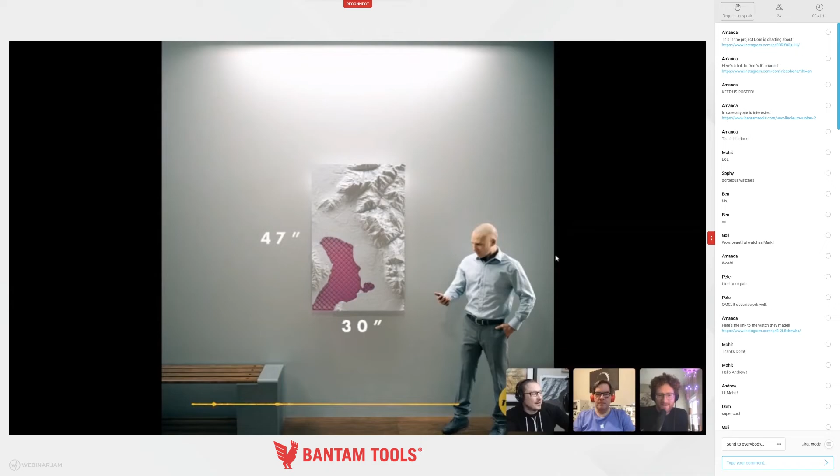Then I had to go over the benefits of using the wood and fitting their cushion in - if we wanted to fit the cushion in, it was going to have to shrink down a little bit. I explained this much better in the actual audio. I'd explain when you use these exotic woods, they tend to oxidize over time and get darker, somewhere between 2 or 10 years depending on how much UV light exposure there is.

But also I was trying to push the high density urethane that I wanted to use, which is kind of funny at the end. So the big challenge was embedding this really flexible rubber inside the piece from the back, without having it fall out, while still allowing visitors to manipulate it.

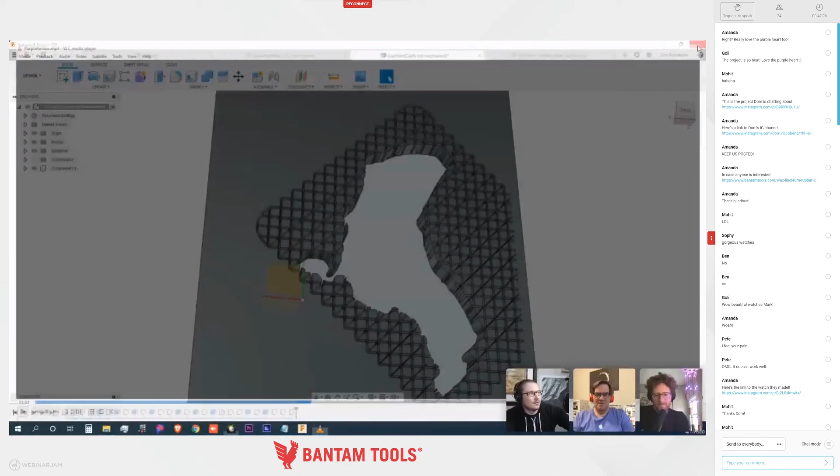The original concept had this corner exposed, and I scrapped that and zoomed out on the terrain more so it was totally surrounded. These cushions are super springy and they twist and go all over the place, so what I had to do was machine the tooling that would have been used to make that into the back of the piece, which was a really difficult operation.

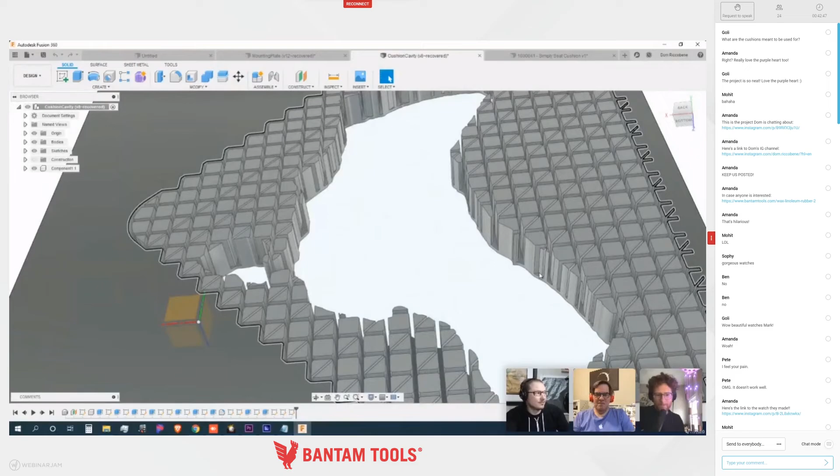Luckily I used really dense material - 100 pounds per cubic foot. I just had to slot out all of these grids, like their injection mold probably looks like. That was really difficult with such hard material, and I had to use an 1/8 inch bit, going little by little. I think I have some footage of that - that's crazy.

Is it silicone or what's the material? It's called MB5000, it's the tooling plank, used for nickel plating mandrels. Oh okay, really hard - it's as hard as a hard hat.

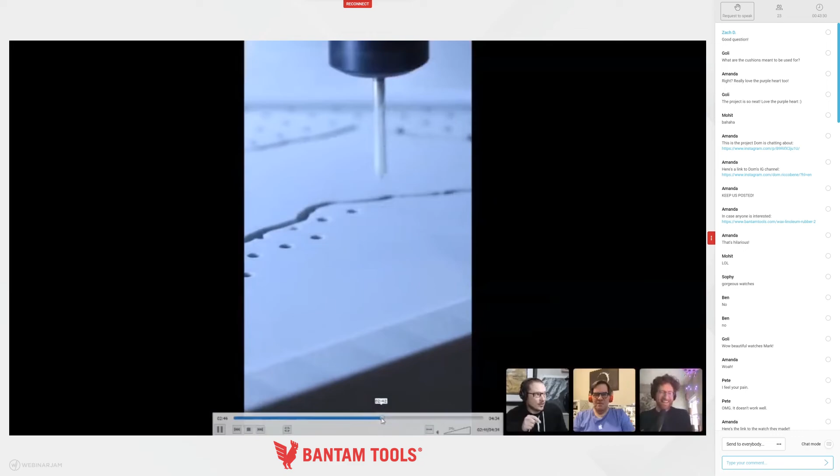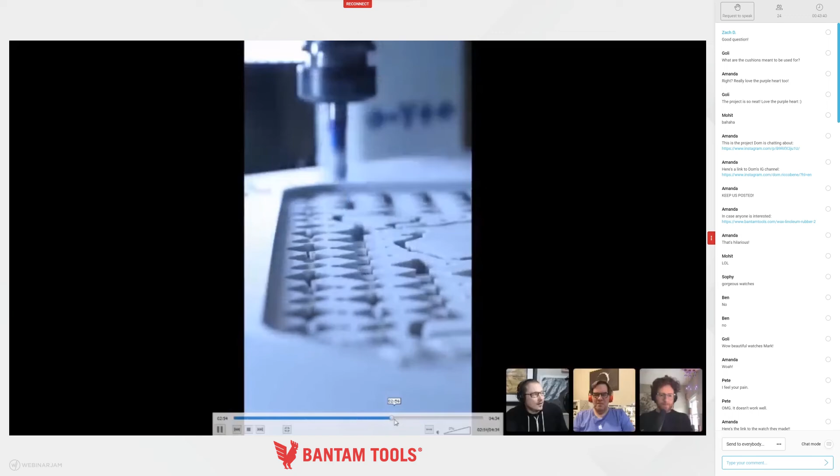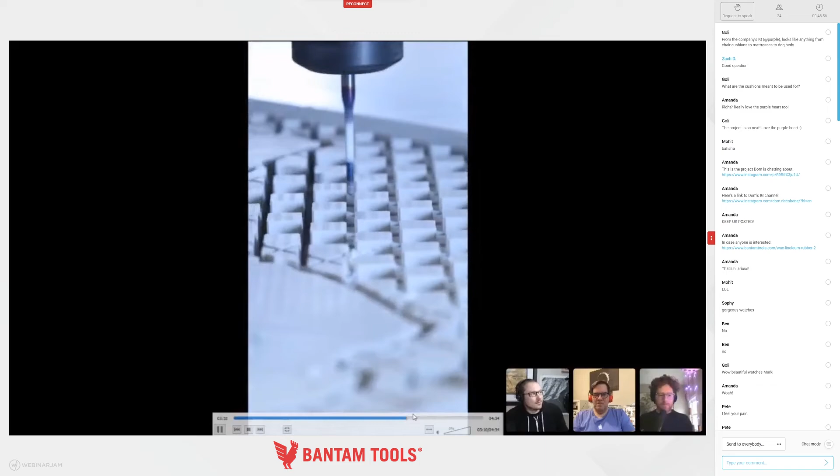So this is the back - the footage is so good. I thought I'd try starting with drilling out the intersections of the grid, but that ended up not being the best way to go about it, because when I did the slots I wanted to ramp into the toolpath, but when I had those holes there, when I ramped it kind of defeated the purpose and crashed right into the side. So that wasn't the best strategy, but it worked all right - I just broke one tool doing that, then I eased off my feed rate a little bit.

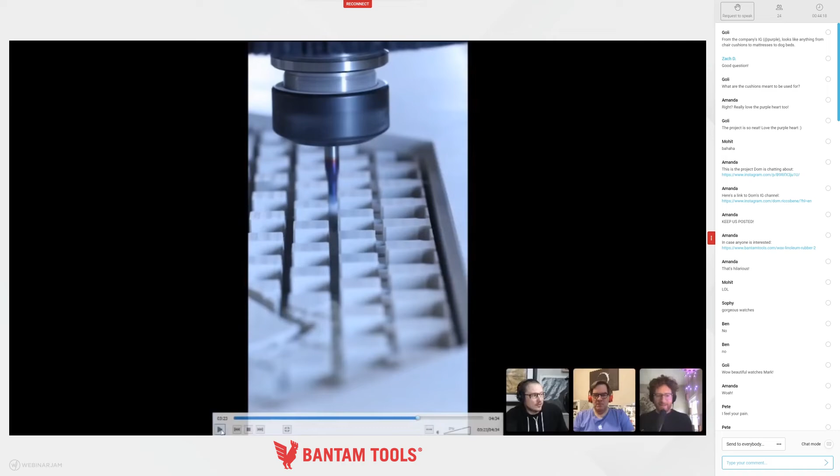What is the pillow material for? That's a seat cushion. Okay, yeah, and they make mattresses but they also make seat cushions. I really liked the seat cushion material - it's kind of transparent. And this is just some slider footage of those passes.

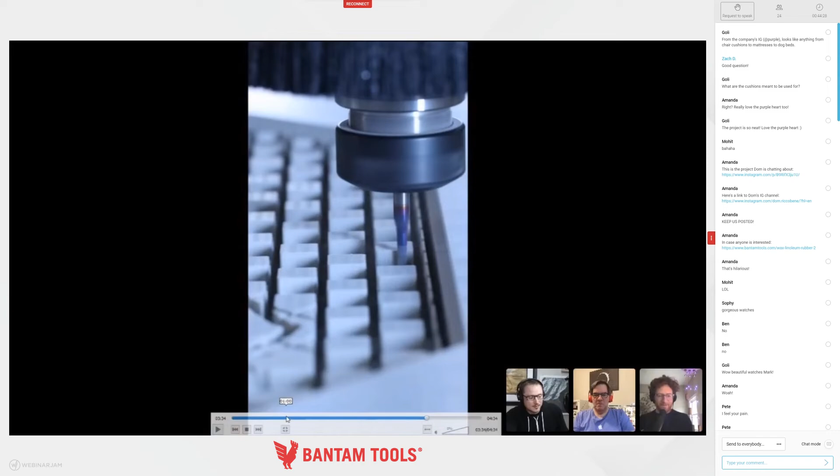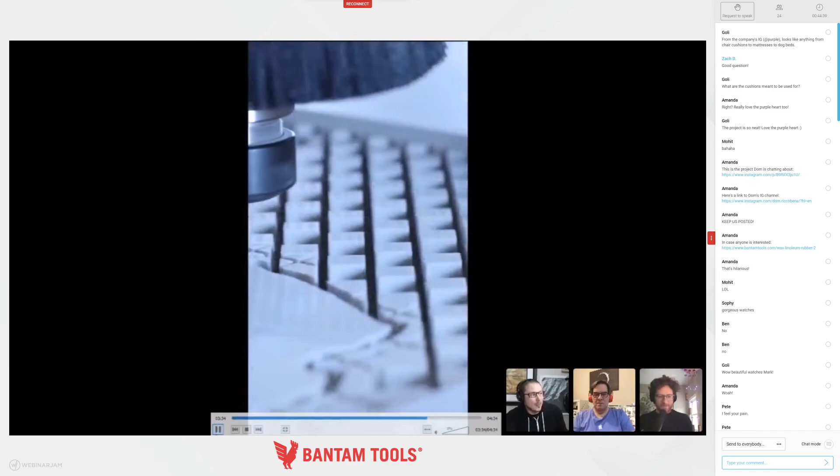Then these cushions come out of their molds. They really weren't able to share that much, but I was able to kind of reverse engineer it - they shrink about 10% when they come out of the mold, so I had to account for that and increase the size of my grid in the back. So the whole thing was suspended into the piece, stretching in every direction.

That's reverse footage. Actually putting it in took like 10 minutes. Yeah, so satisfying seeing you pull it out, some finagling.

But what that allowed to happen was I pulled up with all my strength, and it stayed in there great because the tolerances had to work for the grid - they had to slide in but also stay there. So what I did was actually use a 1 degree taper ball end mill, so there's a slight draft that allowed the grid to slide in but also stay tight enough to remain in there. Very cool.

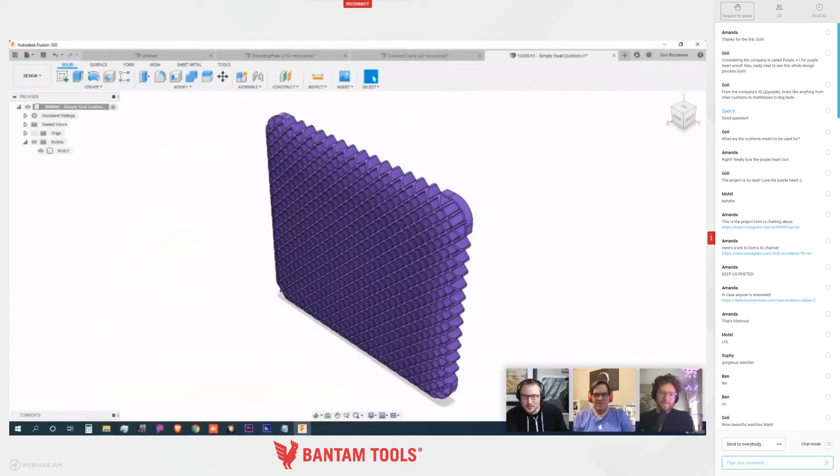Switch back to my... there. So have you shipped this? I did ship it.

I posted a packaging video on my Instagram that I was pretty proud of. I got a pallet - we have a bunch of different size pallets here at the plant - so I got one just the right size, then used purple insulation foam from Home Depot to build some packaging around that. Turned out really good, some on-brand packaging.

Dom, it's so good to see you. Yeah, nice to see you. Nice to meet you, Dom.

Likewise. Before you go, what's on your plate next in terms of projects?

Next, I've been going through all that old footage, and I'll probably put together a few posts from that. That's actually what happened with my Mount Fuji video - when I did that project, I just shot whatever for the story, then left it for 4 months, and looking back at it I realized this would make a great post. It ended up being the best post I've ever made, getting about 20 million views across all the platforms. So I'm going to try to mine some of my footage again and see what I can come up with.

But also, last time I was on I went over my chocolate bar project, and I made a 3D printing video of that mold box. Cool, that's awesome.

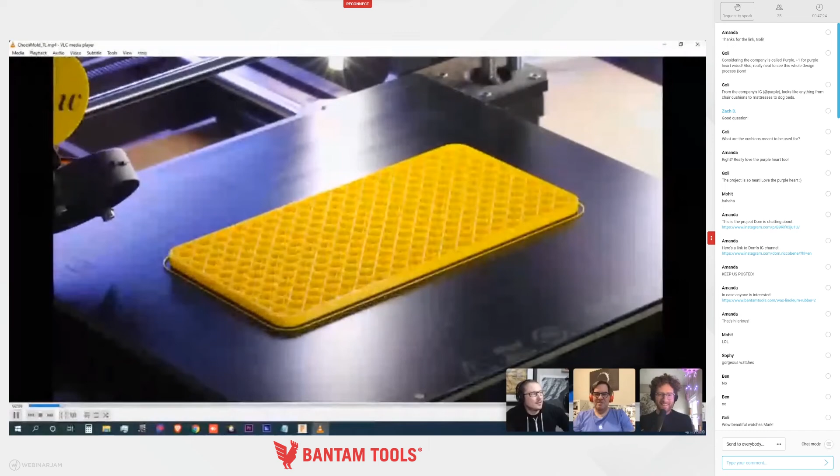This is the box being printed that I went over in Fusion 360 with everybody last time.

If you missed that, definitely check out the live stream landing page, the engineering landing page. So here's the box with a temporary chocolate bar in it, so I can pour silicone in this mold, and hopefully that'll work great.

Nice, so that's coming up next. Cool, all right Dom, thank you. Thanks for having me, yeah definitely.